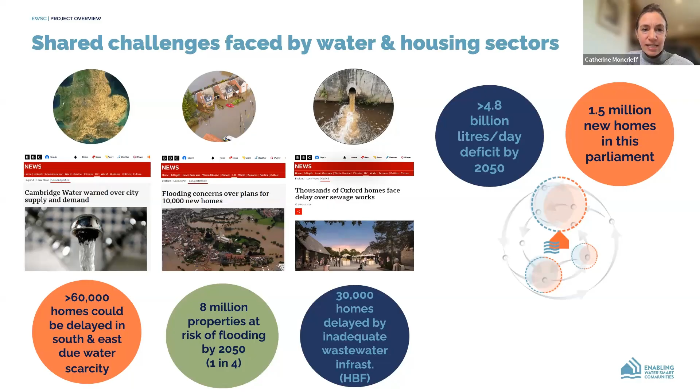Just very quickly, there are some terms I've shared that I want to clarify for the project. An enabling water smart community is essentially where water-related assets and systems, such as rainwater harvesting and sustainable drainage, are included at the design stage of a place and built into its fabrication. But it's not just about the hardware, it's also about the software - members of the community understanding, valuing and taking ownership of those water-related assets and systems, to make sure the value of water and its sustainability is enhanced.

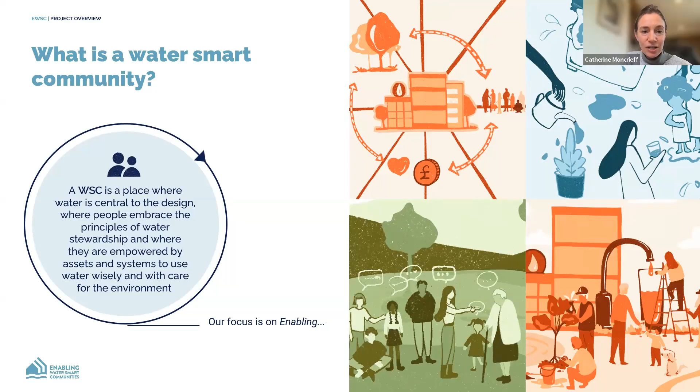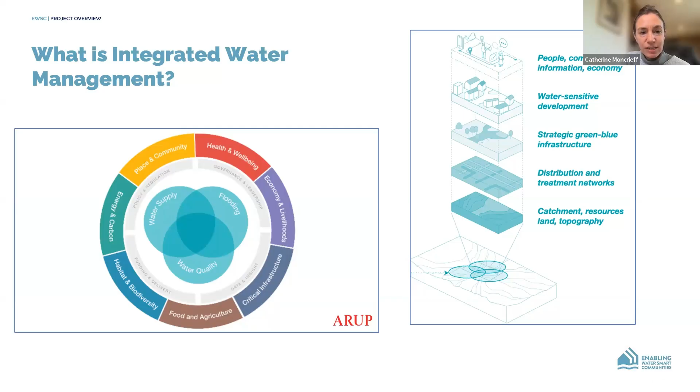I'm going to leave it there and pass on to Vicky and Sean to talk through water reuse safety plans. Okay, thank you very much, Kat.

I'm in the same room with Vicky, so we're going to give this presentation together. Hopefully it will go smoothly.

Just a very brief overview of what we're going to cover in the next half an hour: a bit of background and a brief summary of how we got to this point, a review of the concept of safety plans using the Olympic Park Reclaimed Water Scheme as an example, then the 10 steps to compiling a water safety plan based on World Health Organization best practice. Vicky will run us through the water reuse safety plan template example we've drawn up as part of this project, using a community scale grey water recycling scheme as the example. The template could be used for any type of recycling scheme, but for simplicity we've gone with this one in the report. Then we'll cover conclusions and next steps.

Just to say that the basis of this presentation is all captured in the report we've written, which is still at the draft stage.

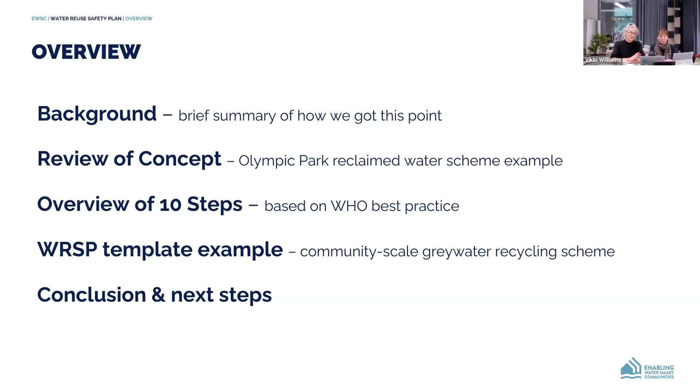So, introduction and background - for those of you who are unaware, and apologies to those very close to the Enabling Water Smart Communities project who'll know about quite a few of the outputs already, we thought it'd be helpful for everyone on this webinar to assume the same base level, since some people might not know about the project. One of the outputs earlier on, at the end of last year, was a roadmap for community scale reuse, drawn together as a result of a series of workshops with water industry people, academia, and regulators.

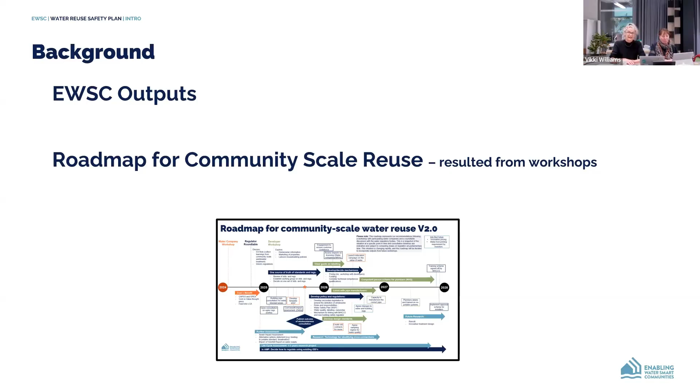I'm sure you won't be able to read this - it's not intended that you can actually read the roadmap, I've just put it up so you can see the types of things we were looking at. We were looking at what activities needed to happen to really enable water reuse to move forward over the next few years, and this is the roadmap that was produced. Just to home in, one of the areas was developing policy and regulations, and if you can read it, one of the activities was to look at water safety plans in the context of what we were doing in reuse. That was over the 25-26 time horizon.

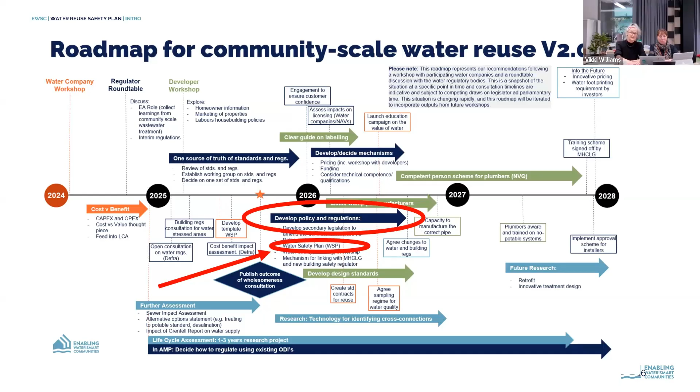So the roadmap for community scale reuse was, as I say, one of these outputs, and it did recommend the water reuse safety plan approach.

The second piece of work done under the EWSC banner in this area is a report called the Single Source of Truth report, which attempted to look at all the regulations and legislation around community scale reuse, put it all together, and identify any ambiguities to help potential practitioners know where to get information.

Unfortunately, quite a lot of the information we found is a bit outdated, and some areas need work going forward - for example, who can and can't supply reclaimed water under the regulations. These are areas DEFRA are looking at currently.

But one important finding of the Single Source of Truth report was that risk assessments are a key tool recommended in the guidance and methodologies we reviewed. If thoroughly and diligently undertaken, they could be an effective tool to help advance projects in the interim, while ambiguities are resolved and new legislation, bodies, and guidance are being developed.

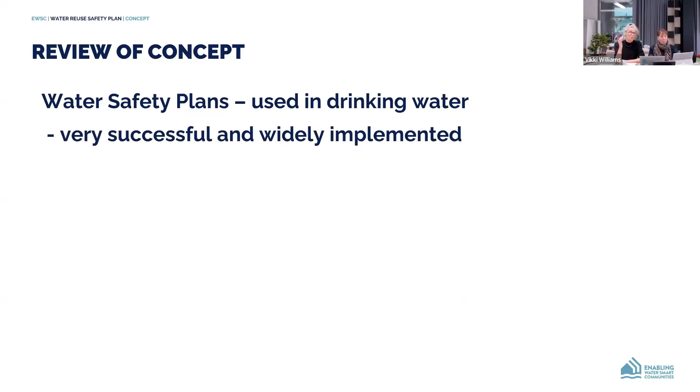They're very successful and widely implemented around the world, and we use them in the UK for drinking water. Some key documents relating to safety plans are the WHO Water Safety Plan Manual, reissued relatively recently in 2023, and our own UK regulations - the Water Supply (Water Quality) Regulations of 2016.

Regulation 28 requires water companies or water suppliers to carry out risk assessments using the water safety plan approach. Interestingly, the WHO also brought out a Sanitation Safety Planning manual in 2022, which is the same sort of concept and approach, but looking at it from a dirty water perspective.

The approach is fairly standard, but safety plans can be undertaken at very different levels. In a developing environment, the safety plan might be quite simple. In the UK, many water companies have a quite complex computerized system which manages their safety plans.

To summarise, it's a multi-barrier approach to preventing risk, looking at water supply from source to tap. So for drinking water, you're looking from the drinking water supply to where the water comes out of the tap.

Taking the same approach for reused water, you look at where you're collecting the alternative water supply from - be it rainwater, grey water, black water - and mapping it through its whole journey to the end use, for irrigation, toilet flushing, whatever. Same concept, but it's been recognised that a water safety plan for reuse perhaps needs a slightly broader dimension of risk, reflecting the greater uncertainties and different risk interactions you have in a reuse system.

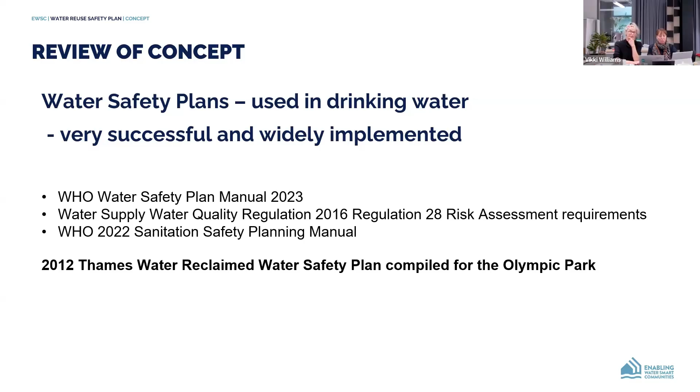Many of you will have heard of this, but for the benefit of those who haven't, I'll quickly take you through what it involved. The Olympic Park blackwater recycling was a Thames Water research initiative in 2012 for the Olympics. It helped the Olympic Park meet its sustainability objectives, and the reclaimed water was used for non-potable uses around the park - quite a large plant.

There's a photograph of the plant here at Old Ford, a membrane plant, producing 574 metres cubed a day, mostly used for irrigation but also for other non-potable uses in the area.

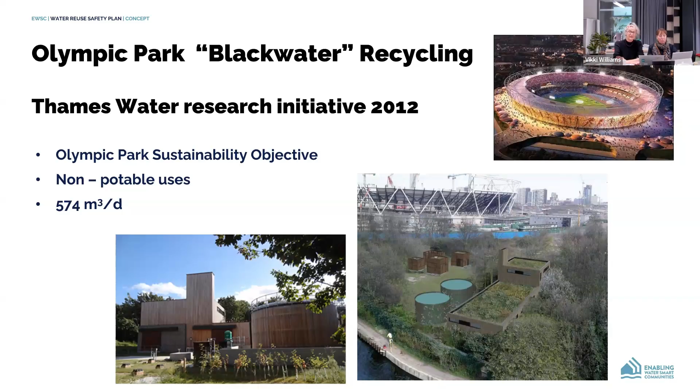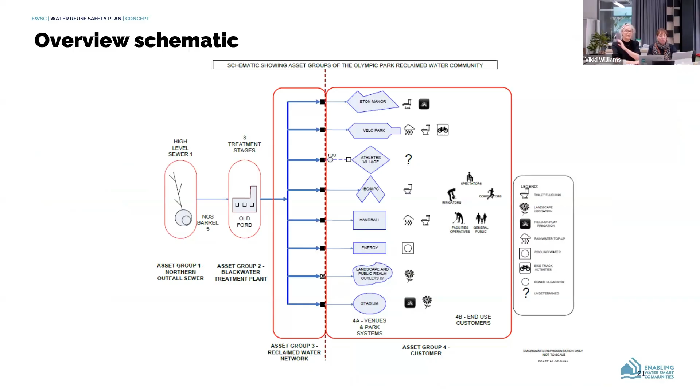So this is a very simplified overview schematic, a type of system diagram one would produce for a safety plan approach. I'm not expecting you to look at all the detail, but just to get the idea that the first asset group looked at in this source-to-tap journey is that raw sewage was mined from a large sewer in East London. That was the first asset group.

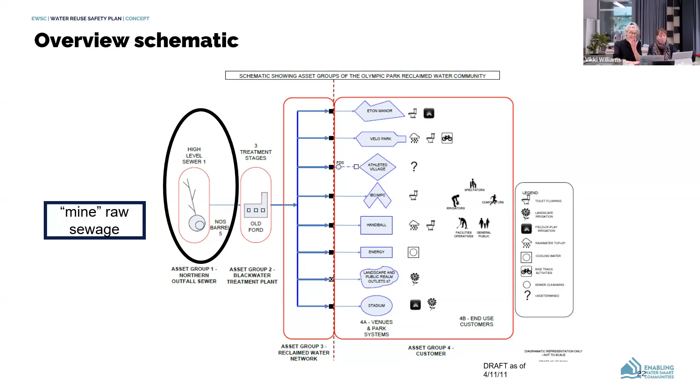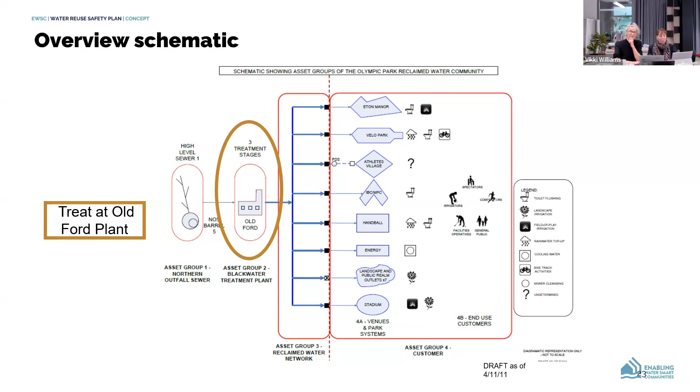The second asset group was the treatment stage. So the raw sewage was treated in the plant that I showed you the photograph of in the previous slide, at Old Ford. Then the reclaimed water was distributed around the whole Olympic Park in a dedicated network.

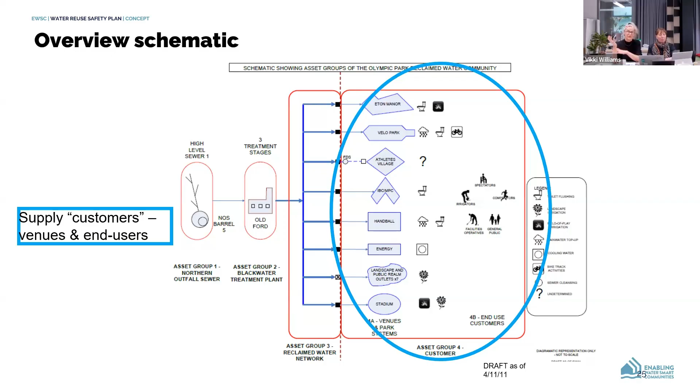And finally, the final asset group considered in the plan is the customer end, subdivided into two areas. Firstly, the reclaimed water risks associated with the venues and end uses - irrigation, toilet flushing, the stadium, etc. What risks need to be mitigated in using reclaimed water in those circumstances. And then also how customers or individuals who might come in contact with the reclaimed water might be affected, and how one would mitigate any risk to them - that could be irrigators, competitors, facilities managers, even the general public walking in the park.

Once the whole safety plan and risk assessments were completed - the detail of which we'll go through later in this presentation - we came up with this sort of final snapshot of what the advantages of having a safety plan can bring. This is a table showing the distribution of risk, if you like.

We looked at 51 different potential risk situations, and the red risks were mostly found in the customer venue arenas. So having a safety plan approach helps you home in on which are the most important areas to deal with first as part of your action plan.

In this case, the red risks were to do with unmarked underground pipework, reclaimed pipework, unlagged irrigation pipework, and Legionella risk. Also, a lot of places seem to think it's a good idea to top up reclaimed water with untreated rainwater, and that can have quite a detrimental effect on the overall quality of the final product.

So just a snapshot of how using the safety plan and the approach can help you identify where you really want to concentrate your efforts going forward.

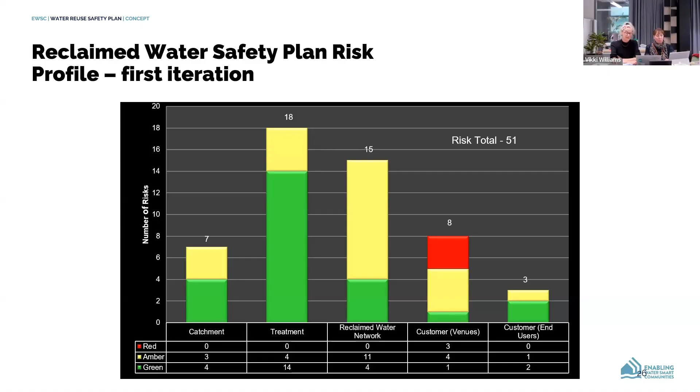A little bit about governance. Because reclaimed water at this scale was new in the UK at the time, it was a bit unclear how the whole system should be managed. So in consultation with all the regulators - DWI, EA, HPA at the time, etc. - it was agreed that compiling a reclaimed water safety plan would be a good way to proceed. That's one of the reasons why the plan was compiled.

It was then reviewed by the regulators, and the Environment Agency issued what was called a regulatory position statement, and that was the mechanism at the time for us to feel confident we could continue with the project. The safety plan also led on to a whole raft of internal actions as well.

Because as part of the plan you have what's called an action plan column, so we could develop procedures and new ways of working. What's quite important is to bear in mind that it's a dynamic document with ongoing review, reviewed at agreed periodic stages.

So that's just a brief overview to set the scene of how it worked all those years ago at the Olympic Park, but very few large schemes have progressed since then. So going forward, I thought it'd be useful to give you an overview of the way the WHO approach this, and then how that feeds into the template we've drawn up to help practitioners move forward.

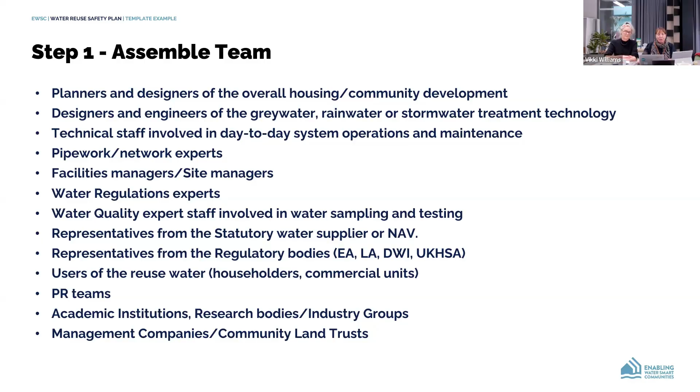So we've highlighted here just a range of different stakeholders and participants that might need to be involved in that process, and it really is important that all of these views are captured. And I think one of the main important roles that we've identified is that ownership role, and having that team leader who can coordinate all of these different experts to get the outcome that you're looking for.

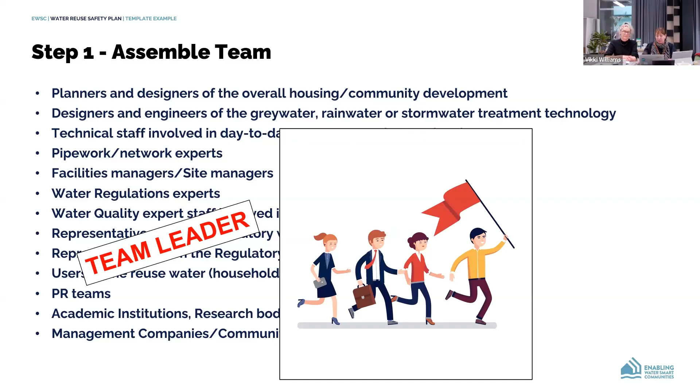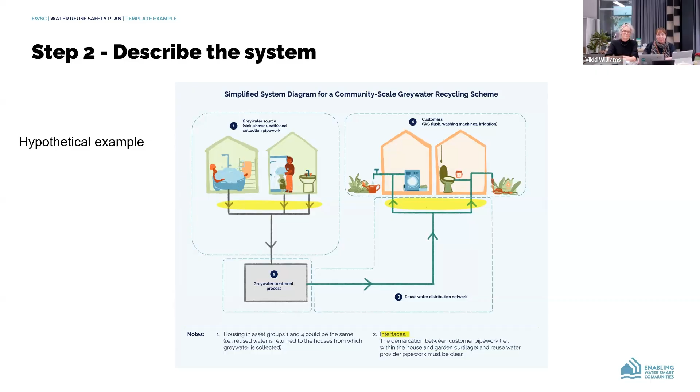So Sean and I worked with this hypothetical example. You know, other examples are available, but we're really talking about community scale grey water recycling schemes, but there can be alternative and other sources of water.

But just for the purposes of this indicative plan, we used a grey water source, which was coming out of the customers' homes, you can see, and the yellow highlighted parts represent the interfaces between customer and a reuse provider. And then it goes on to the specific types of treatment plants and the various different manufacturers and deliverers of these different treatment plants, and they could be also operating and maintaining the system, and so are key players and partners that need to be involved.

And we assumed also here that there would be a reuse water distribution network, and this sometimes, because it's underground, is one of the areas that often gets forgotten in terms of the pipe work. And also just bearing in mind, if we are having these reuse systems in these dual pipe systems, there may need to be redesign on both of them, on understanding the water system as a whole to these customer premises.

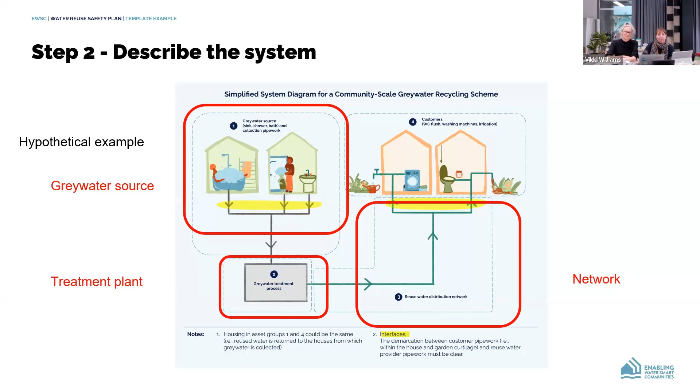And then finally, the customers themselves, there needs to be a really good understanding of what the purpose of the reuse water is being used for. So for the purposes of this example, we talked about how we would use it for WC flushing, washing machines, and potential irrigation.

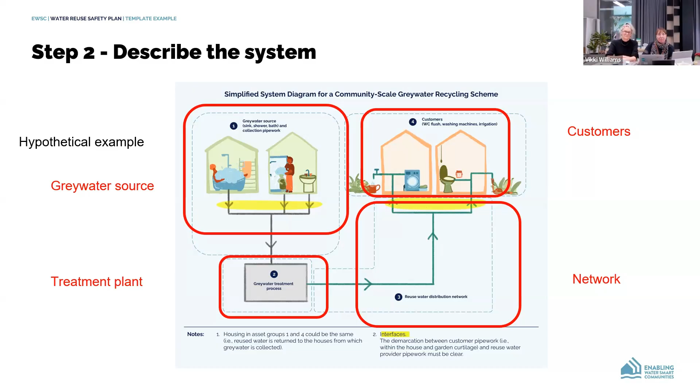Once the system is described, and it's quite good to put the schematic in there, the next step in the process is really identifying the hazards and the hazardous events.

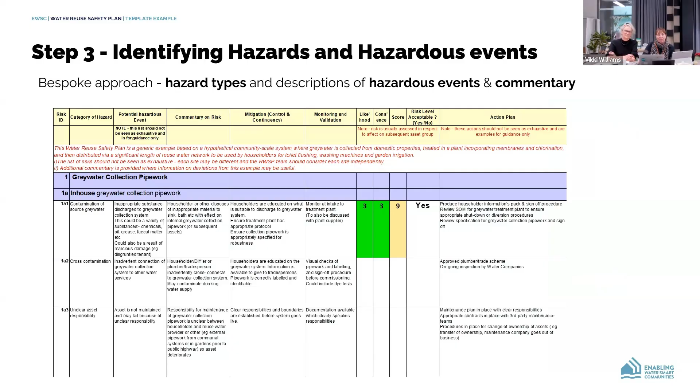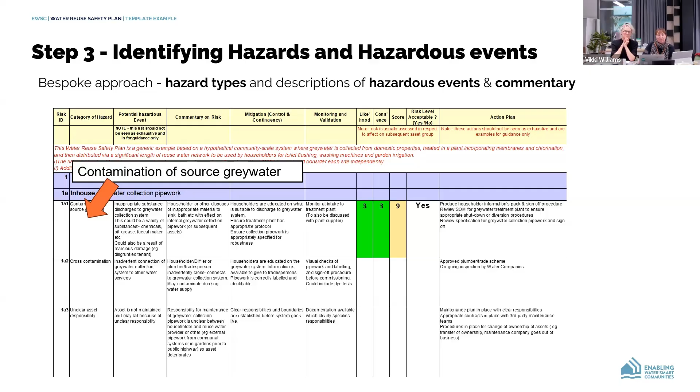I'll take you through an example one that we have developed here, which is around what happens if there is a contamination of the source grey water. So that's the hazard.

What is the event that could happen from that hazardous event? Something inappropriate could be discharged into that grey water collection system. This is where some of the parameters come in, and you can see what people potentially would be using in the home. There could be various chemicals, oil, or grease, or in certain circumstances fecal matter entering the system if people are doing certain things in the bath system that you wouldn't expect. So it's about thinking about what could happen.

We also need to consider that if people don't like these systems, there could be potential malicious damage that could happen. So it's really understanding what those hazardous events are.

Then there might be some additional commentary that you might put on there from what you've seen, and this could come from examples you may have seen before of circumstances that have happened. This is where a householder may put inappropriate material in the sink or a bath, which may impact the grey water collection or any of the other downstream assets.

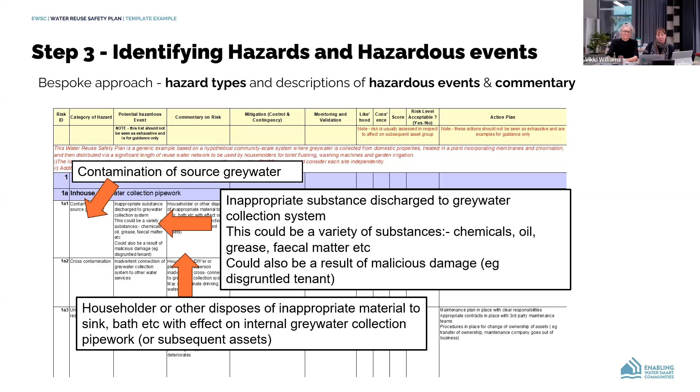I want to talk about the risk assessment. There are other metrics out there, but overall what we looked at here is a risk assessment based on the likelihood of something happening and the consequence.

For the recommendations, you can have a single stage risk assessment, which just looks at the risk at the end once you've put in the mitigation measures, or you might consider a dual stage approach. The drinking water ones tend to have the dual stage approach, which looks at the risk assessment before you put any control measures in place, so you can see a change in the risk and hopefully a drop in that risk.

But with some of the reuse schemes, when Sean and I went through the programme, you have to realise that the pre-mitigation risk is usually nearly always high, so you're always starting off from a very red place. So for the purposes of the template example, we decided to incorporate a single stage post-mitigation mechanism, which represented what we thought the residual risk would be.

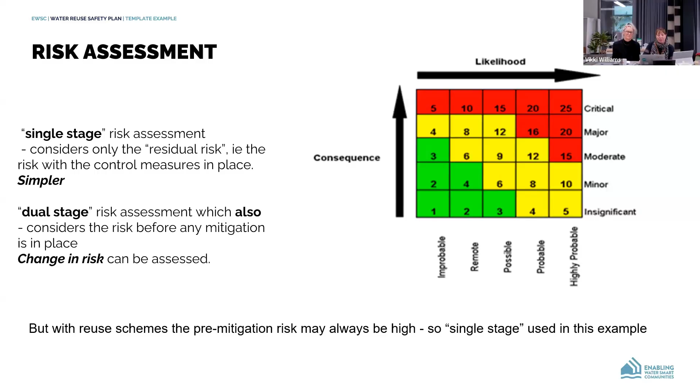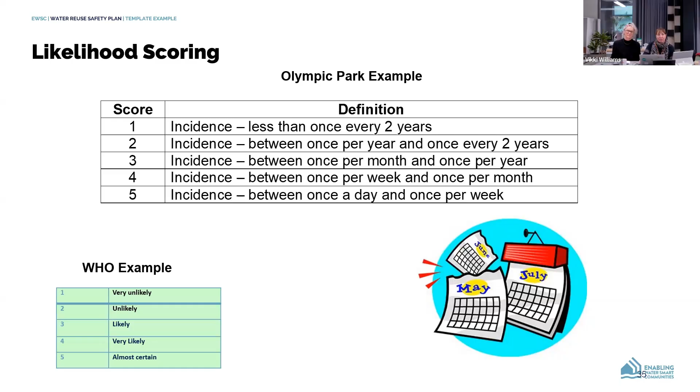Just a small commentary on likelihood scoring, and there can be some debates on the incidences around likelihood scoring. Up on top of the screen is the one we actually used during the Olympic Park, and we put some timing around that for when we would expect to see the incidents. But the WHO example keeps it in descriptive parameters from very unlikely all the way through to almost certain.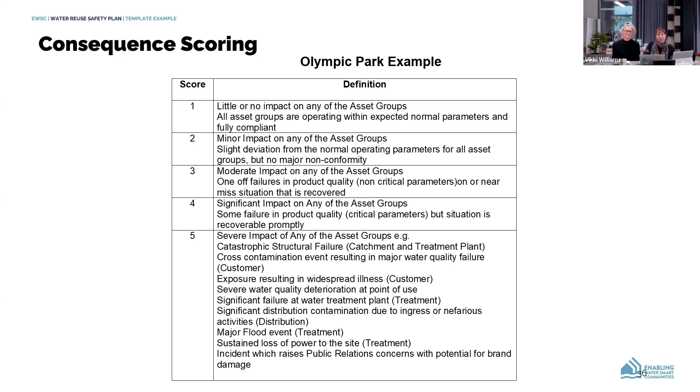So moving on, here is a sample risk assessment. When we publish the template, there are tens of these, up to about 50 types of hazard that we've identified through the whole process.

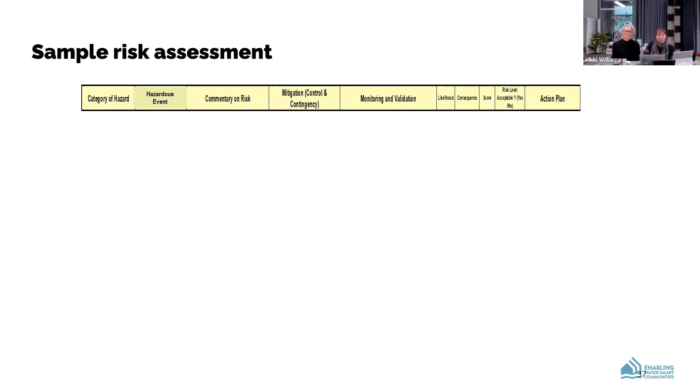To give you an idea of the process we went through, the example here is contamination of that source grey water. The hazardous event would be the inappropriate substance discharged to that grey water collection system, and then how that actually happened and came about, because how it happened may be really important for assessing what mitigation you might put in place, and what assets, or downstream assets, may be affected.

And then what control measures were you proposing here, and it's fair to say some of these might be quite hard measures to implement. For instance, where these customer risks are, you might have to train or educate householders on what is suitable to be discharged into the grey water system.

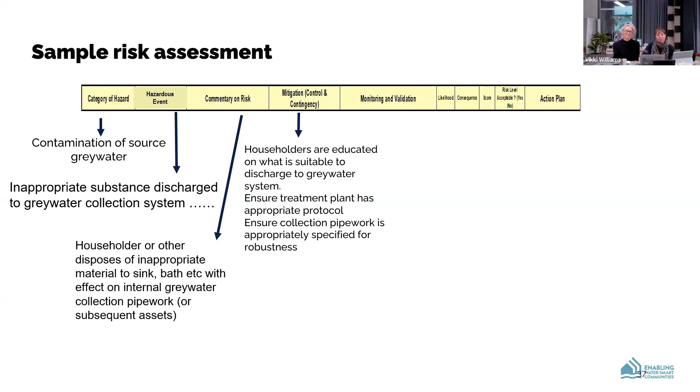The other thing to think about is what that means in terms of the treatment protocols or operating procedures at the treatment plant. During the Olympic Park, for instance, we had some very extensive operating procedures across the area that served as mitigation.

Some of the ones that don't often get called out are actually the source of the collection pipe work, making sure there's appropriate specification for robustness, and that the installers and managers of that pipe work suitably understand the implication if this particular hazard and hazardous event comes to pass.

The monitoring and validation is about the sampling strategy you need to put in place. That can be part of this plan too—which parameters you need to be sampling, or even proxy parameters that could give an indication something needs attention. Given these will likely be provided by third-party providers, it's important to get their input. We've been working closely with the Reuse Association on this, and they can be very helpful in getting monitoring regimes up and running in their systems.

So then we come to the scoring, which is the post risk scoring that lets us think this is a reasonably acceptable level. But we won't stand on our laurels—we'll make sure we have the appropriate action plan in place that we can monitor against.

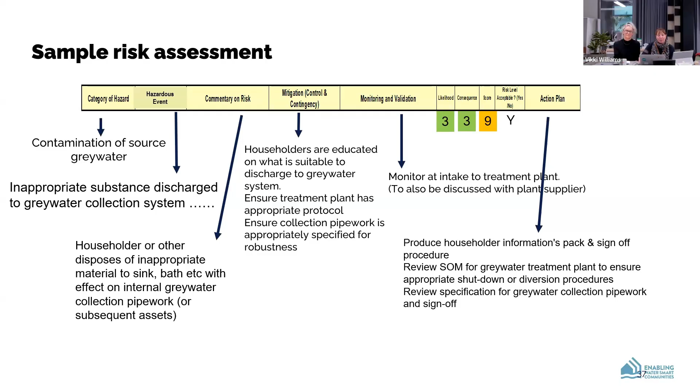So we would produce the householder information pack, and have something in place for when there's a change of occupier. There would be site operating manuals on the treatment plant, reviewed at least annually or when there are changes to the treatment process. There would also be a specification for the grey water collection pipe work, installed correctly with appropriate sign-off.

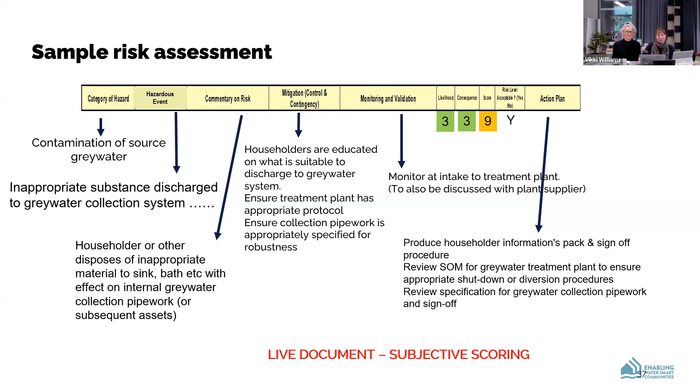I think Sean mentioned this point, but it's very important that these are always live documents, and that when there are changes to the system you're continually updating that. Also be aware that it's based on subjective scoring around what different parties think is acceptable risk.

So just to run you through the concept, which we'll be publishing: the first part, which I've talked about, was the importance of the team, and I've run you through describing the system, how you'd go about identifying hazards and hazardous events, looking at control measures, and making sure there's an appropriate measure of risk.

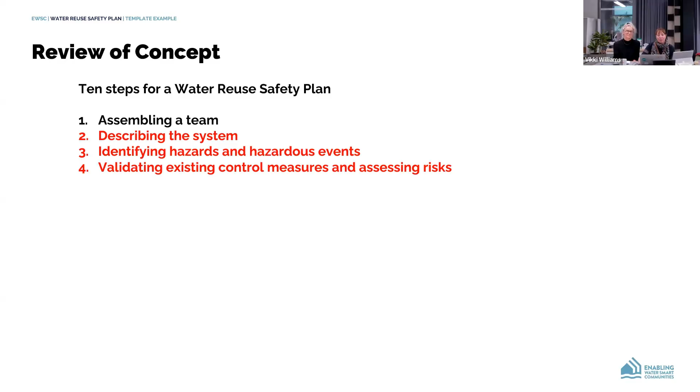But it doesn't end there. This is a continuous improvement process, so we always want to ask, as new technology comes on board, what are we doing in terms of planning for improvement? Can this be delivered in a better way? Are the control measures in place actually suitable?

Because monitoring can change over time—there's increasing accuracy of monitoring devices, and it's always important to map the devices to the levels you're trying to look at. There should also be someone who steps back and looks at the effectiveness of the safety plan. You shouldn't just be doing this to fill in paperwork—is it actually effective at helping us drive and manage risk?

All the time there need to be appropriate management procedures kept under review and actually implemented. Bearing in mind there are different stakeholders across the group, information needs to be shared and disseminated. There may be other supporting programs in here too, and this would have to potentially fit in with water companies' safety plans. So how does this move in parallel with that? What happens when you've got different water and sewer providers?

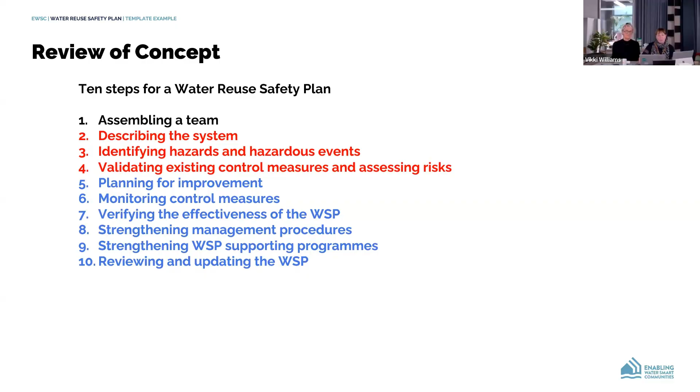So how do you manage all the supporting programs of that? The very important thing is making sure this is constantly reviewed and updated, and there is a suitable owner of the system. As Sean said, there are various formats, but we intend to publish a multi-sheet spreadsheet, which will be available on the Enabling Water Smart Communities website shortly for any parties that would want to use it. We're very happy to receive feedback on that from all participants on this call and wider.

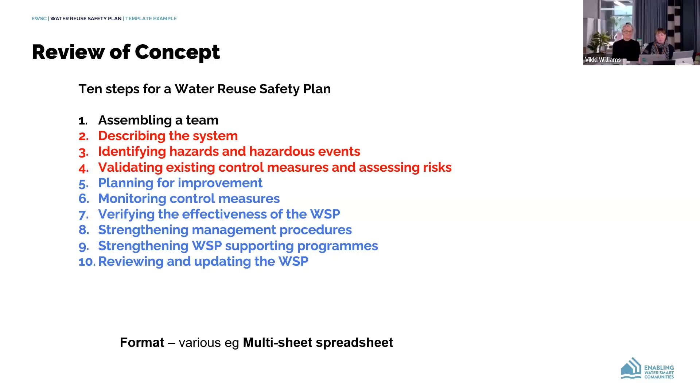So in terms of conclusions, what did we think and what did we learn? We actually think the safety plan approach is a recommended way forward for reuse type water activity, particularly when looking at these community scale recycling schemes. When Sean showed you the Olympic Park example, the red risks sat on the customer side, quite rightly. We think in this case this is also true, because you've got two touch points: when the water comes into the system and when the water goes out of the system.

But there are some challenges in the UK context in implementing and utilising this approach successfully. One of these is around the owner of the assets and where all the responsibility lies. Who are the owners? Who are the operators? Who are the stewards of that system? Through Water Smart Communities, we've been concentrating a lot on those stewardship models and what that means. It's really important to take that into account, which I think is a real distinction from the classic safety planning approach, since there will be different owners and operators of the assets within the system.

There needs to be a real understanding of which regulators or entities should be responsible for signing off this approach, and if it goes wrong, what are the challenges or issues around dealing with any failures within these systems.

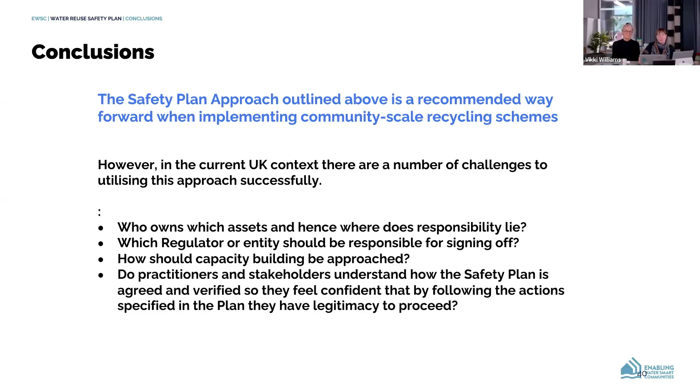Just to reiterate, the template spreadsheet will be available, and it does have an accompanying safety plan methodology, which will be published on Water Smart Communities. We've sent the DWI a draft copy of the report, and there is a reuse working group to look at these areas that need to be implemented when these types of systems get utilised. So I'll pause there and say thanks for listening to us.

And thank you, Vikki and Sean, that was an excellent run through. I feel like I know quite a lot now about water safety plans, which is good. And I think those reflections at the end on responsibility, regulation, ownership, and capacity building are big challenges, or big things we need to work through as we take this forwards.